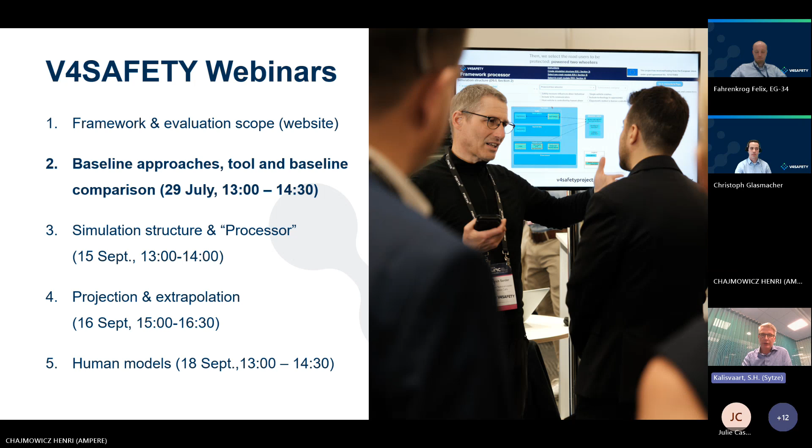As said, we're talking today about baseline approaches. However, before we go into that, I think it's good to have a look again on the V4SAFETY framework. We have split it basically in 5, we call it themes. So these are the overarching topics and then the different topics below that. Today, we will focus mainly on the preparation of the simulation.

So you will see later in Henri's part also simulation results and some simulations, but I think in particular Christoph and my part are more on the preparation of the simulation. And obviously we have one topic dedicated to select the baseline approaches. However, it is closely linked, as you will see later, to prepare data and select models.

The first part, and I think you all are more or less familiar with different kinds of study, but we always think it's a good reminder to tell you why the baseline is so crucial. In these prospective safety performance assessments by simulation, we typically talk about a comparison between baseline and treatment, and baseline is the condition without the safety measure present, which should be assessed, and treatment is the condition with the safety measure present. And basically you want to compare that.

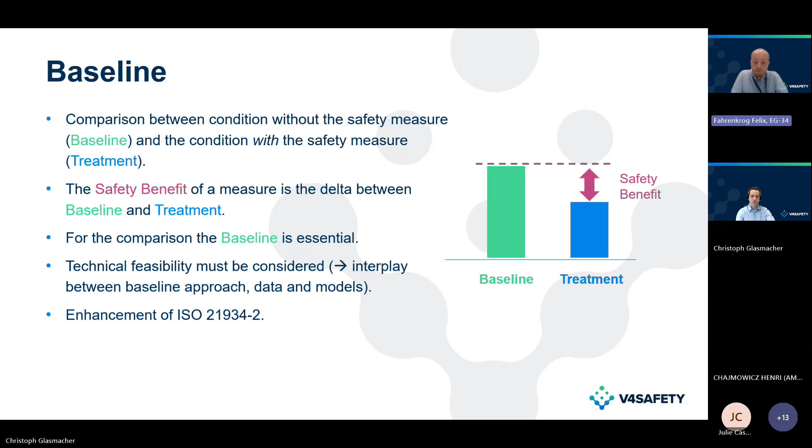And in that perspective, it's maybe also important to underline once more why we took an effort to classify different baseline approaches. We know from the past there were many different approaches, and if you want to compare results, then you have first to check, is this really the same baseline approach? Have different approaches been selected? And instead of explaining all the stuff which you have done, we thought it's better to have a kind of classification. And in V4SAFETY, we started, as said, from the ISO technical specification. And this is basically the first layer, where you decide on the main baseline approaches. And we distinguish here between approach A, B, and C.

A means you have one original case. And this could be recorded data from a naturalistic driving study or an FOT, but it can be also reconstructed accident data. So GIDAS PCM would be, for instance, one example. And you aim then really to simulate this scenario without any major modification. Then there is one approach, which we call B, simulation of original cases with modification. So it's quite similar. Again, you start from a concrete, original, recorded, or recalculated situation, but you would like to add some modification. This could be changing some parameters to account for uncertainties. It could be also to add a certain system. So if you have very old data and you want now to consider an ABS system, then this could be also an approach.

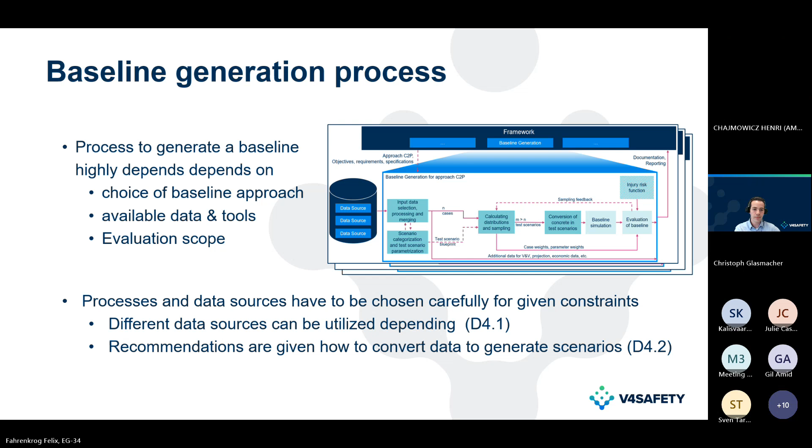Here maybe also just a short reminder, since that is quite a broad topic. We actually have generated 2 deliverables. One just about the data sources, since that is really the core to build a baseline. And the second one about the actual process, how to come from that specific data to scenarios which can then be used for simulation. So I would quickly go through these, and as said, data sources are one of the most essential ones, since that's really our input.

And therefore, what's important is that data always have certain limitations. They normally always have a certain bias, maybe bigger, maybe smaller, and that has to be accounted for, as well as the amount and general quality of data we have. So we have categorized 23 different data source categories that we can use for assessment, and we have to evaluate which ones make sense for a certain part of the framework. Therefore, we have developed certain requirements in the framework itself and applied them in terms of what's actually important for certain data sources for certain steps in the framework.

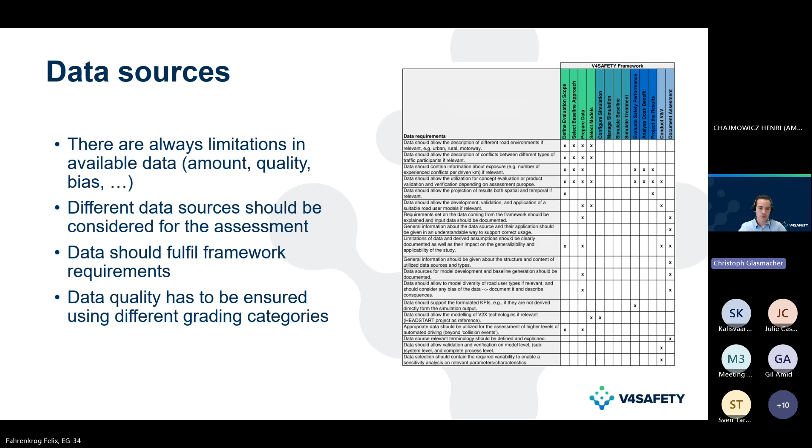In reality, you may have different data sources which you may want to use. So therefore, you want to be able to merge them, have to align references, have to align biases, and maybe even rate those data sources so that you can afterwards use that for, for example, creating scenarios, which then is actually the second step. So once you have the data, you want to make sure that you categorize that data and create test scenarios out of that so that you can really use them in the simulation.

And well, then we do have certain steps which are rather optional depending on which baseline approach you're choosing. If you're just having an A0P approach, so basically taking our cases as is, then we do step 1 and 2, that's fine. If we do a generation for our C approach, so synthetic cases, we don't take the cases as is, but we're building distributions out of that, and then sampling again out of those distributions. That's basically then that step, which is important for that C approach.

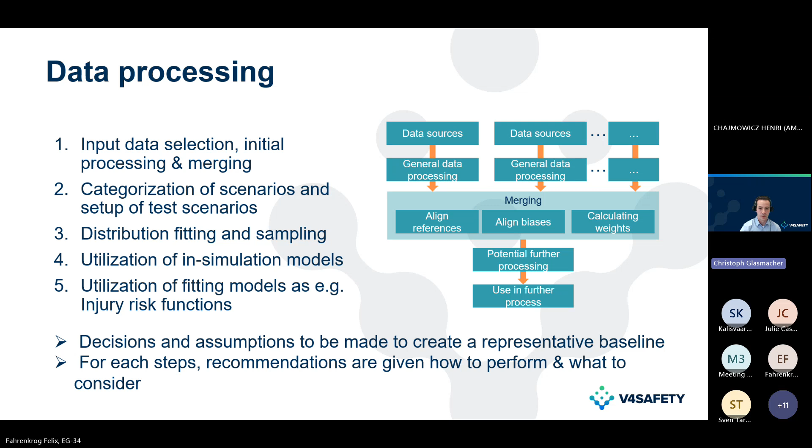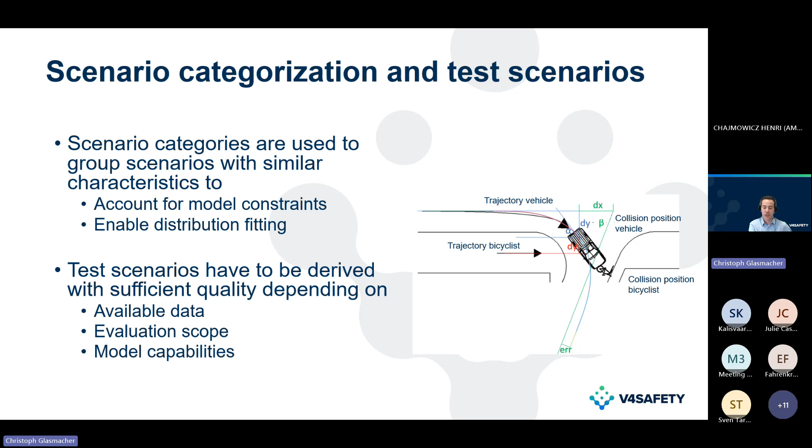Yeah, maybe then just a really short example on our second step. So we said we want to create scenarios from the data. So we have to categorize, to group them, which is particularly important for generating distributions, to account for specific model requirements, for model ODDs which we may have, and then deriving test scenarios out of that which really suit the evaluation scope and the other constraints we have. The example you can see here on the right is one from our use cases, where we parameterized a trajectory for a B approach and then used that in one of our assessments.

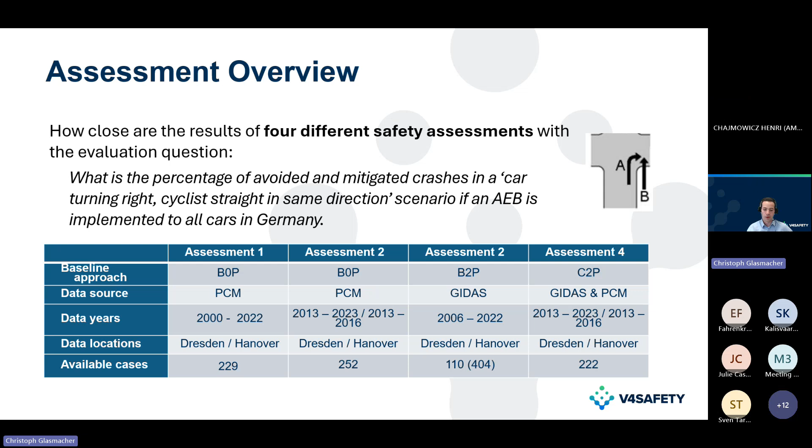For that evaluation, we don't only have a look in the end at one number, because yes, we could just have a look at one number, and I'll show you that one number in the end. Though it's also interesting where deviations come from, because the baseline generation I've shown is not just one step, but it includes multiple steps, which we then also investigated. So first of all, having a look at the original data. I've shown that they had different data available, so we compared that one.

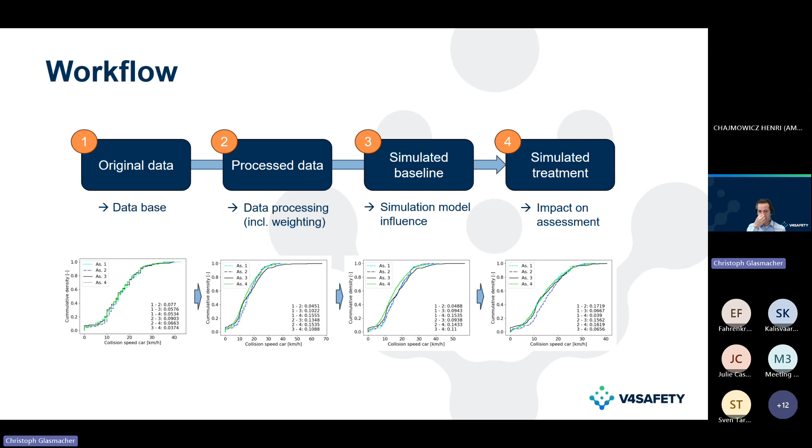Then we compared the processed data before a simulation. So basically weighting data and accounting for certain data bias, which may be in the original data source. Then the simulation was made. So that's basically then a third step. And in the end, I'll show the result compared to the treatment. And yeah, I would go through all of these steps one after each other.

And maybe let me explain first of all the picture, what you can see. You of course have different parameters which you use to generate your scenarios, and in the end to get a result. And what you can see here is always just for one parameter, the cumulative density function. Meaning that here, for example, we do have the collision speed of our vehicle. And then we know that at 20 km/h, approximately half of all occurrences are from 0 to 20 km/h for a certain assessment. We of course always have 4 lines here because we do have 4 different assessments.

If we now have a look at that and just recalling, we do have GIDAS and PCM data, which is actually quite similar, but still, of course, different granularity to some extent. Also, not 100% the same data. So what we do know, what we can see, is that we do have differences in that data.

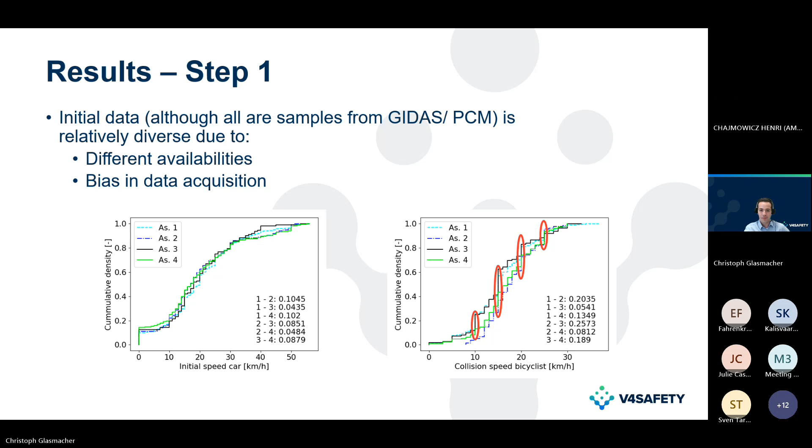which is actually not the same for GIDAS and PCM, but it's also not the same for example, Dresden and Hanover. So there we do see that those peaks are not the same, but look a bit different. So already in our first step, we do have a certain data bias which we have to account for.

Therefore, we do have our second step, and in our second step, just to recall, that's our processing. And in our processing, we account exactly for that kind of data bias depending on our baseline approach. So for our B0 approaches, we can weight individual cases, that for sure. But what we do for our C approach, and that's what you can see here on the green line, is that we can now use a distribution modeling function. In that case, I think just a regular PDF function.

And then we do see that we get some deviations due to assumptions which are made for that C approach, that we do have a longer tail for that, and therefore the distribution of initial speed is not too high then in the mid-range, but we increase that a bit to the longer range, which was basically the assumption a partner made. Though we do, of course, get uncertainties for that.

And what you can see here as well, just to go quickly over that, we made pairwise comparisons between the different assessments, so between 1 and 2, 1 and 3, and so on. And we had a look at the maximum deviation, which can, of course, to some extent decrease or increase from step to step. So we've seen that we now also get certain deviations from our step 2, but other deviations we can actually reduce due to that weighting.

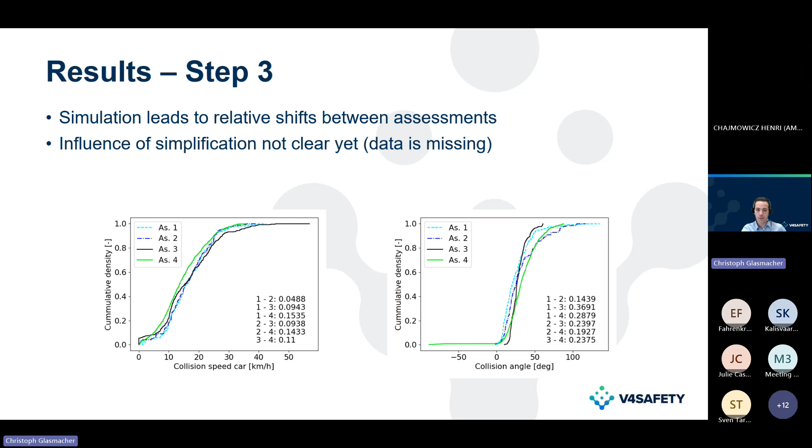but just so much right now to show that, well, we are in the end pretty close for the collision speed between these assessments, though we do see that we have quite a big deviation for the more geometric values, which you can basically see here on the right side, especially between assessment 3 and assessments 1 and 2. So 1 and 2 was more or less PCM, and 3 and 4 was more or less the GIDAS data used.

So I said, not going too much into the simulation itself, but having then a look at the results, and that's what I promised in the beginning. We do have 4 different assessments. We do have one question which had to be asked. And now, ideally, since all followed the V4SAFETY framework, we should have one avoidance rate, which should be ideally the same for all.

Though we have seen that we, of course, do have certain deviations because some assumptions have to be made. We do have certain data limitations. We do have different simulation tools. So what we can see is that we do get avoidance rates between 4.9% and 14.2%.

So they're all, and I think that's quite important, in the same range. And also having a look at the confidence intervals, most of them are overlapping, though it's important to mention here that the confidence intervals are only based on the mathematical or statistical calculation and do not include biases or assumptions made within the assessment.

Though I think here we are really rather close, but it's important to mention that we do have deviations due to data bias, due to the assumptions, which can be different between the different assessments, and then of course also due to the tooling. So to conclude, for comparison, yes, we can see that when comparing two assessments, we do have small deviations.

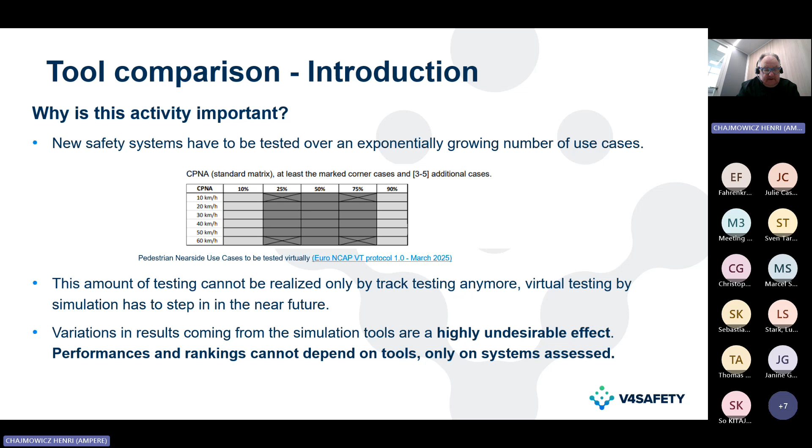We want to assess the performance of the systems, and we don't want different tools to interfere. We don't want, for instance, exactly the same system assessed by virtual simulation with different results because different simulation tools have been used. This is really undesirable. So these are the effects that we wanted to study, to see whether they were important and whether they could be reduced or not. So what did we do? Oops.

So what exactly did we do in the context of the project? We set a specification. So we specified a given system to be assessed over a set of use cases. I'll come to that shortly. And we let a group of partners implement the specification and see what kind of results they got in the round-robin logic. And I just mentioned that this is in cooperation with the P.E.A.R.S. Initiative.

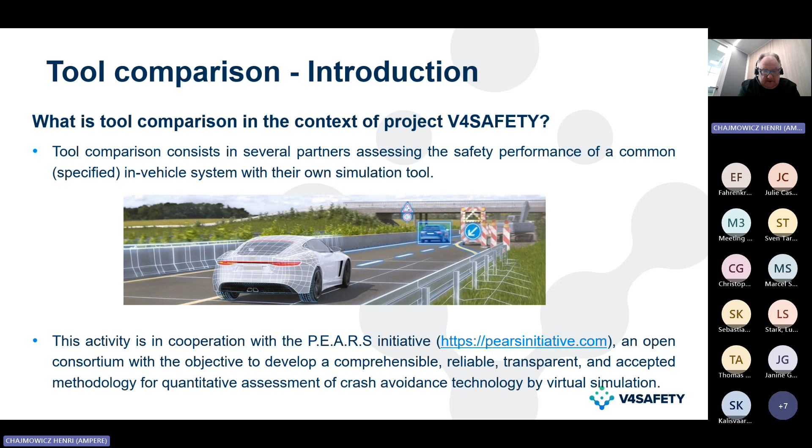And the idea was to see whether we saw... So we have had a variety of partners run these use cases. Then the measure was automated emergency braking for cyclists. Sorry, I didn't list that. And the idea was to see whether there were differences between assessments, which were caused by the specification, the interpretation of the specification by the various partners, and which were connected to the tools themselves. And the question was whether we could reduce the differences to a minimum, because we don't want differences coming from the tool.

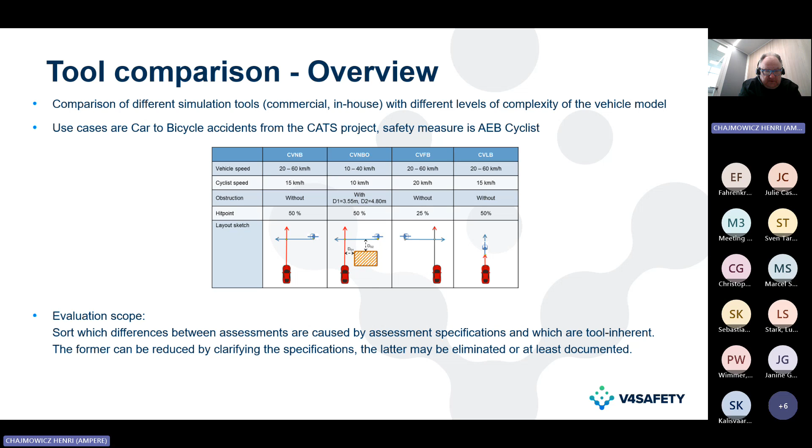Right. So again, we had the first run. This is published, by the way, at ESV 2019, and all the use cases you just saw were run by all partners, and we had an analysis of the results. We looked at discrete indicators like accident avoided or not, also the values of impact speeds, and we also looked at the timelines, for instance, speed and acceleration profiles of the vehicle under test. And we saw variations, right? We saw that discrepancies or variation could appear at many stages of the simulation. The simulation chain is a complex chain with many blocks, many systems, and there can be variation at pretty much every step.

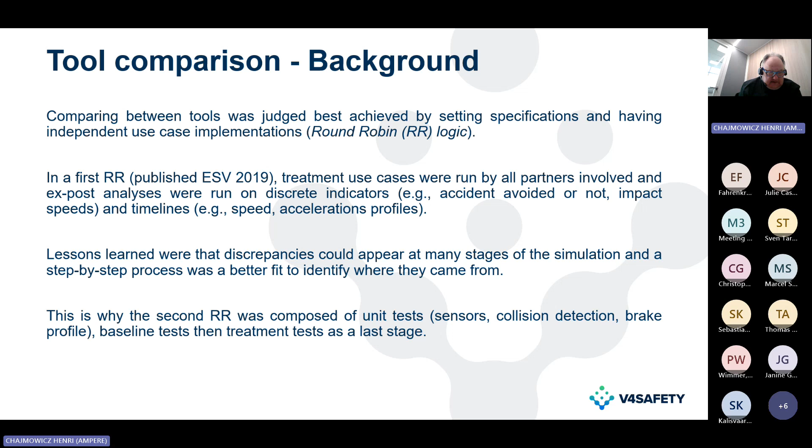So we tried to have maybe a less naive approach in the second round robin, and we tried to assess for each block of the simulation system whether there were discrepancies, and try to reduce them at every step prior to launching the actual simulation with the treatment, with the AEB, on each of the use cases. So reducing the variation prior to launching, seeing the simulation of the system as the last stage, when possibly every source of variation has been reduced. So that's just a recall. That's the first round robin. Again, this is published.

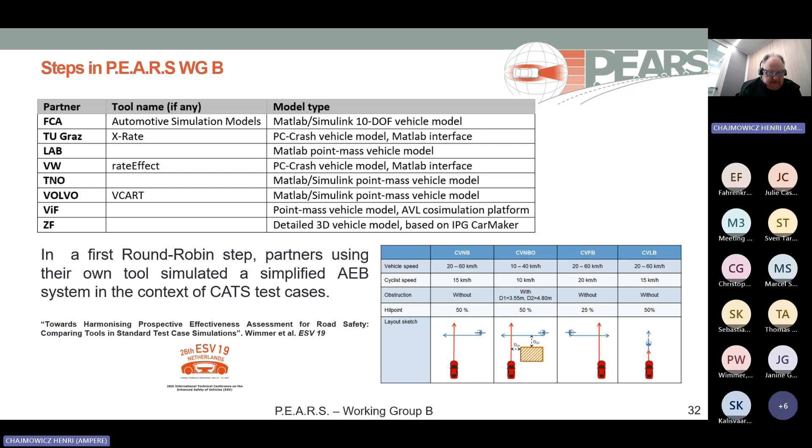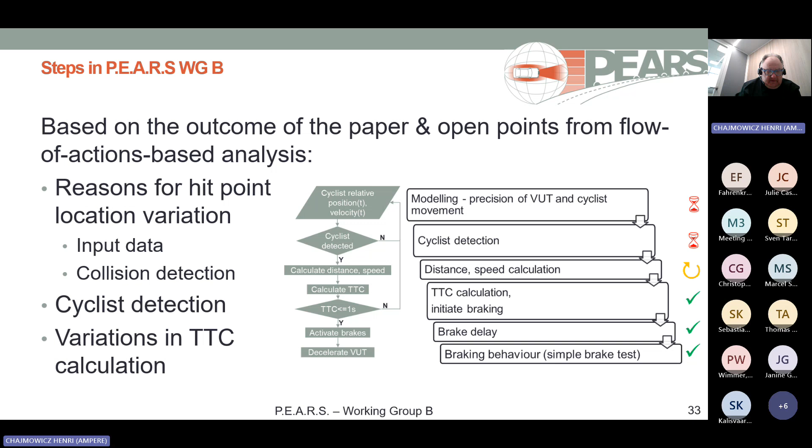These are the types of simulation tools that were used in that first round robin, and we saw variation in time to collision calculation. The autonomous emergency braking system that we implemented relies heavily on calculating the time to collision. So if there are variations in the way time to collision is calculated, this is a good cause for variations in the results. The detection algorithm also we found to be different: the detection of the cyclist, detection of the collision. Also, in the baseline, we saw variations. So all of these accumulated to generate variation in the results. So we tried to reduce all of these in the second round robin.

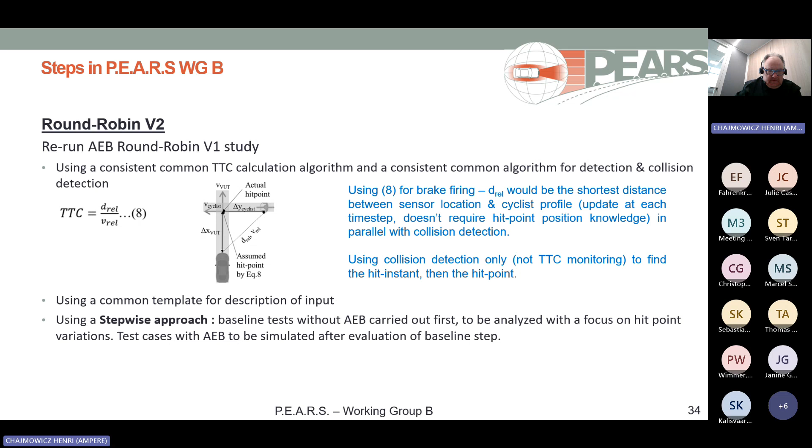So this is an example. We found at least three or four different ways to calculate the time to collision, even the relative distance. What is the relative distance between the vehicle and the cyclist? Even for that, there were variations in the tools. This was quite unexpected, but still. So again, we used in the second round robin what we call a stepwise approach. So let's see.

The first step was to assess whether the tools were able to reproduce the baseline. So the baseline is the original use cases, the original accident. There is a hit point on the cyclist that is prescribed. So could the tools reproduce the baseline? In the simulation, did the car hit the cyclist at the right point, right? No treatment, just a simple baseline. And this was pretty much of an effort already.

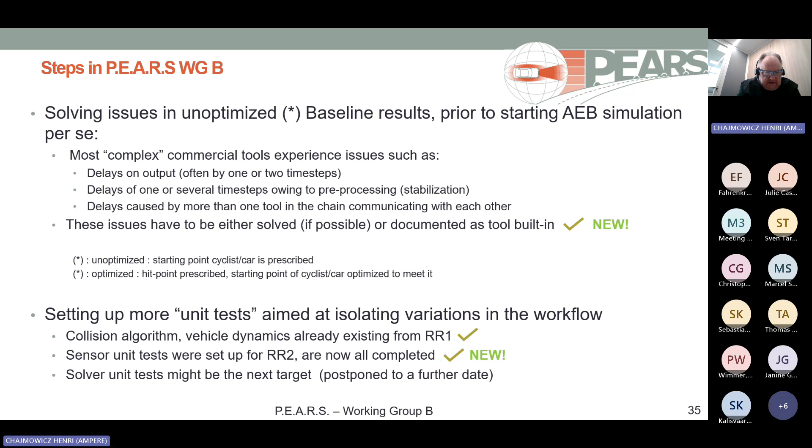Let's see. So the first thing we tried to do was we sent the vehicle colliding with simple obstacle half planes, and then more complex shapes, such as a square or a diamond shape. And we assessed whether there were differences in the time of the first detection of the obstacle, and in the position of the vehicle at the time of collision, whether there were differences there as well.

And for some partners, it took some effort to be in the same range for these two indicators as the others. For instance, collision was not, for some partners, detected at the same pace or at the same time step as the dynamics of the vehicle. So this led to discrepancies. But this had to be corrected to have a good accordance between the tools.

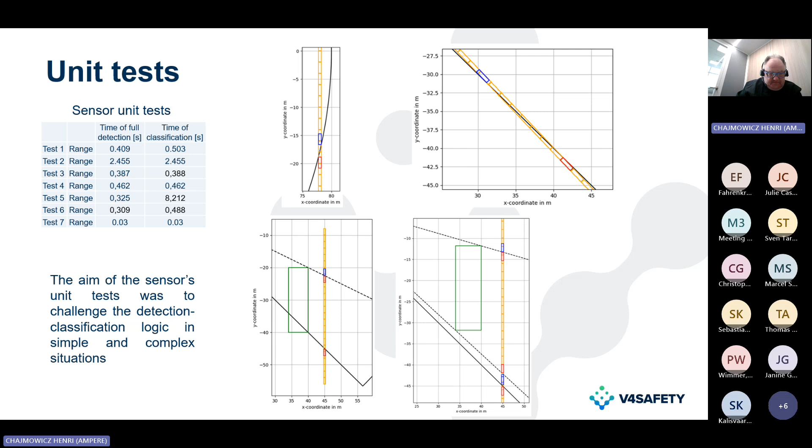The baseline can be seen two ways. Either the hit point is prescribed and the partners optimize the baseline so the hit point is reached as in the specification, or the non-optimized means that the starting point is prescribed in a way consistent with the hit point, and we see how the different tools behave. In the end, we chose the optimized baseline because all the partners could set up a baseline that would lead to the prescribed hit point being reached with a sufficient degree of accordance with the others.

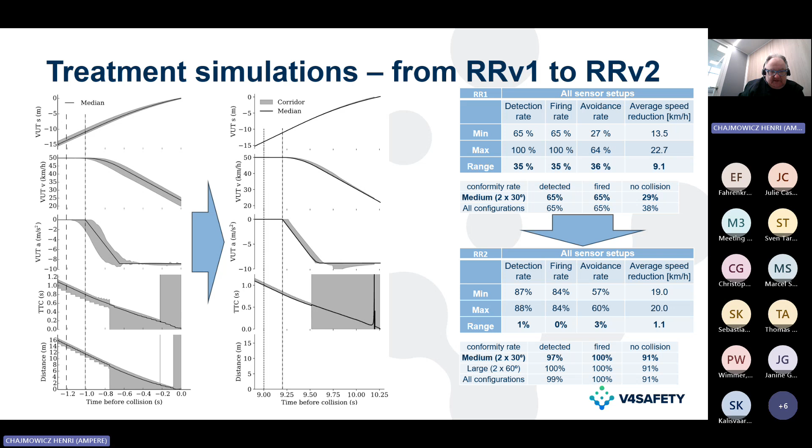And one other, oops, what is this here? Nope. I'm going back. Sorry.

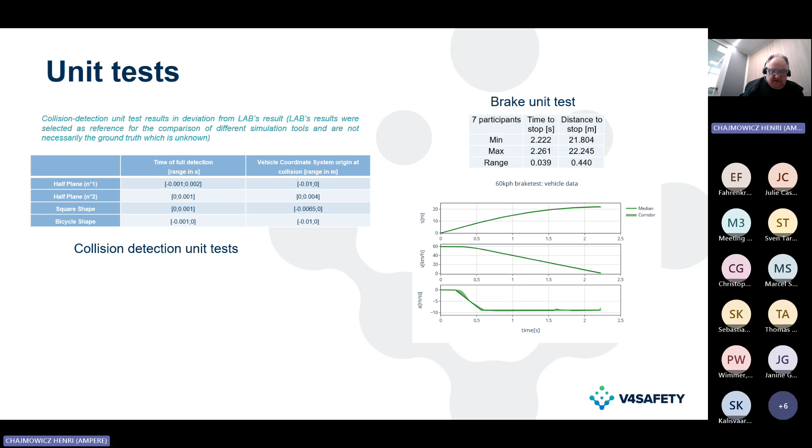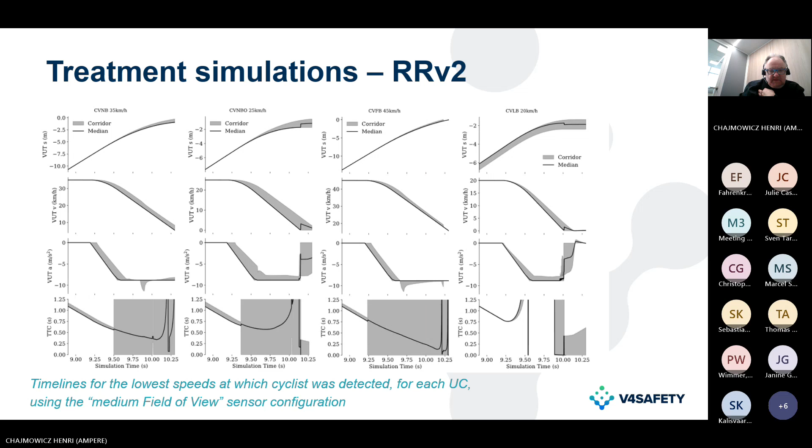So these are the corridors for there. If you remember correctly, in the CATS use cases, there are 4 constellations. So these are the corridors that we get for the medium field of view. So we tried 2 fields of view for the sensors in the assessment, and this is what we get at low speed. So the corridors are still large, and this is what we get without changing the sensor.

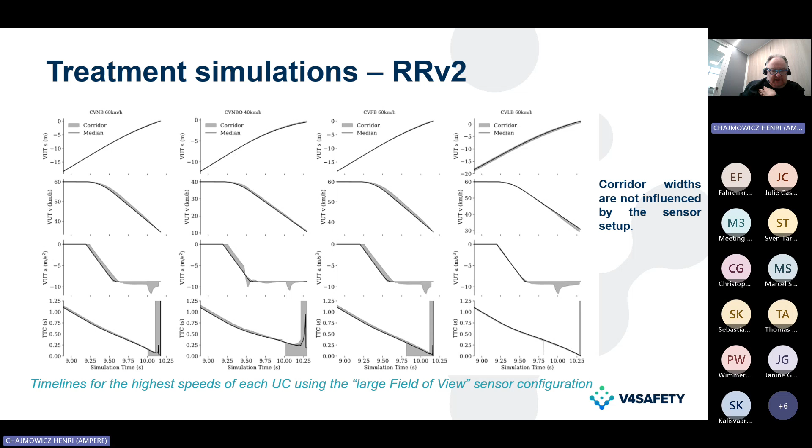This is what we get at high speeds. So the corridor width does decrease when the initial speed of the vehicle increases. And between these 2 slides we have just changed the sensor. So we have a much larger field of view in this one. This is still high speed, and we don't see any significant difference here.

So, what can we conclude from this simple experience? So, we can reduce the variability in assessments. Results coming from the tools themselves can be reduced. We have to work for that on the assessment metrics, for instance, well, time to collision, or also the discrete indicators that you just had a look at.

Setting simple unit tests to reduce variation at each step of the simulation is quite crucial, and it seems to us a good way to eliminate variability. And one crucial step also is to check, without simulating the measure itself, whether the simulation tools can reproduce the specified baseline, because if we have variation from the start, we cannot hope to have harmonized results in the end.

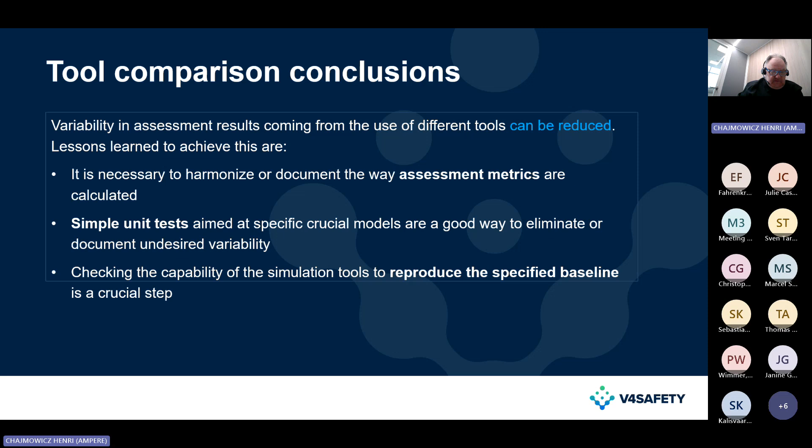And why does it? Oops. Why? Okay.

Next steps. So the next step is for us to share this experience we had, because we know that there is variability in track tests. That's known already. But there is also a variability coming from the simulation tool, and that has to be eliminated. So we want to share this, and also the fact that this variability can be reduced using thorough specification.

And another activity that we see as a follow-up would be to set reference baselines that each coder could test the tools on. Also reference unit tests, setting repositories for that, for each coder to have a go and see how the different tools or the new tools to come compare to the results we got in V4SAFETY.